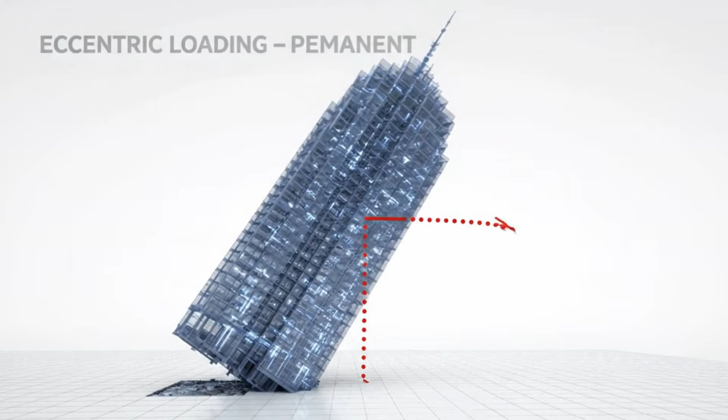The developer called it a bold statement in glass and steel. The architect called it a triumph of modern engineering. The marketing team called it the future of luxury living in New York City. The building called it something else.

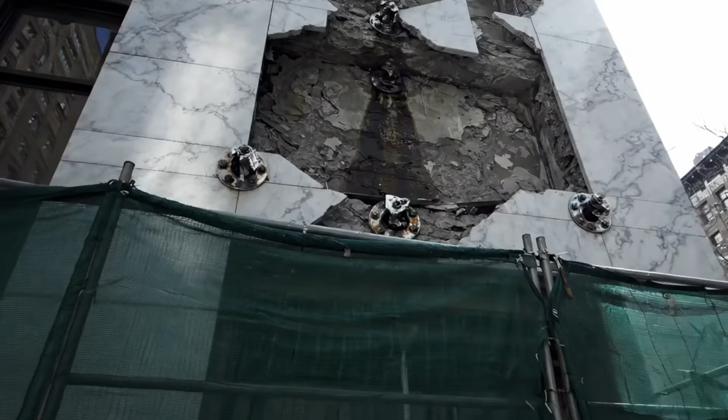Today, 161 Maiden Lane stands in Lower Manhattan like a question nobody wants to answer. It is 670 feet tall. It is structurally compromised. It has never been fully occupied. Marble panels have fallen from its facade, some weighing hundreds of pounds, crashing onto the sidewalks below. The city has declared it a public hazard. Protective netting wraps its lower floors like a bandage on a wound that never closed.

And the building bends. Not dramatically, not in a way you'd notice walking past, but stand far enough back, look carefully at the profile against the sky, and the tower curves, slightly, unmistakably, like a pencil balanced on its eraser and left to drift. Engineers call this a lateral deflection. New Yorkers call it the banana building.

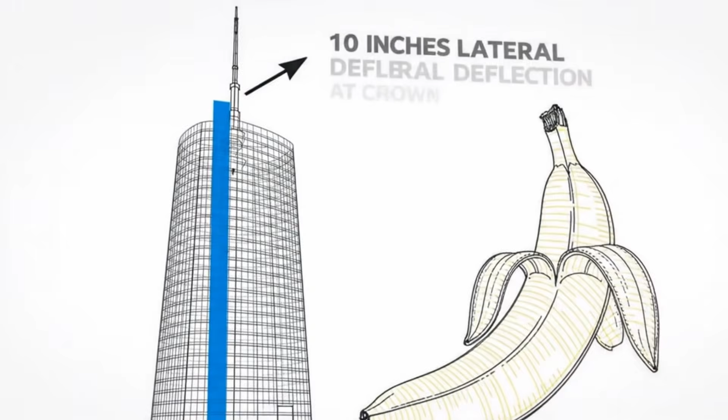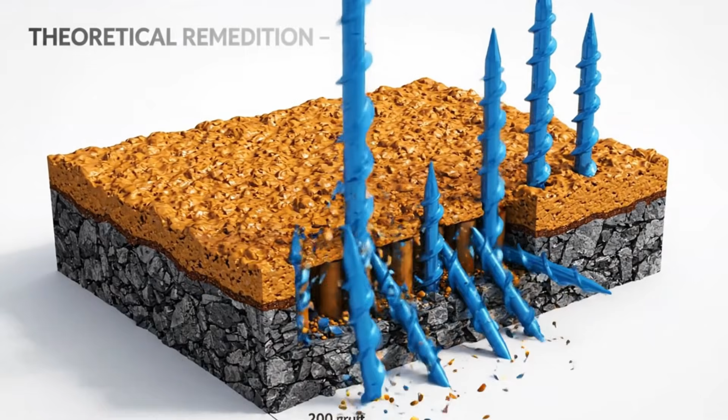$250 million was spent building it. Hundreds of millions more have been spent fighting over it. And the building remains unfinished, uninhabitable, unbending in its refusal to either be fixed or fall. This is the story of 161 Maiden Lane. And it begins not with corruption, not with negligence, but with something far more dangerous. It begins with a shortcut that looked, on paper, like genius.

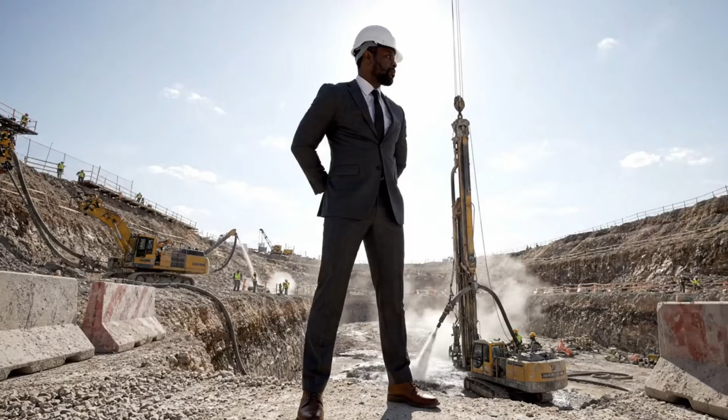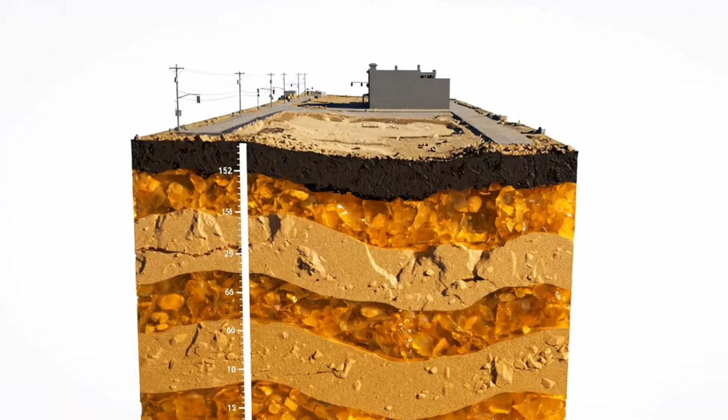The original sin. Every engineering catastrophe has a moment, a single decision buried in a spreadsheet or a meeting room that seems reasonable at the time and catastrophic in retrospect. For 161 Maiden Lane, that moment was a choice about the ground. Manhattan sits on some of the most reliable bedrock on Earth. Schist, dense, ancient, crystalline, metamorphic rock that pushed up from the Earth's crust hundreds of millions of years ago. It's why Manhattan can hold skyscrapers at all.

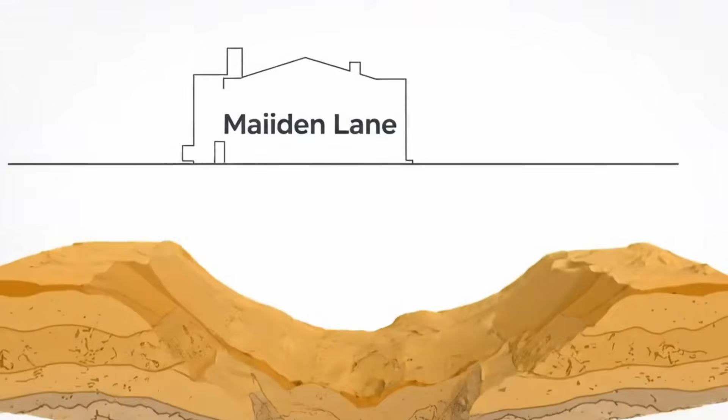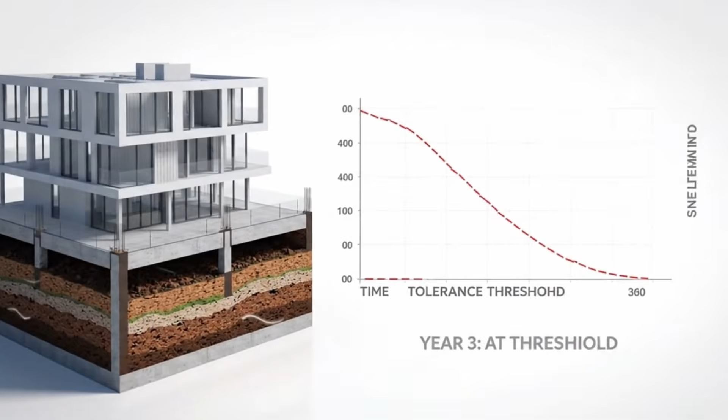Midtown's bedrock is close to the surface. So is downtown's. The island was built to carry towers, but between those two bedrock plateaus, in the area around Maiden Lane, the schist dips. It drops down, sometimes 150 to 200 feet below street level, beneath layers of fill, sand, and soft glacial sediment deposited after the last ice age. You can still build there, but you have to go deep. You have to find the rock.

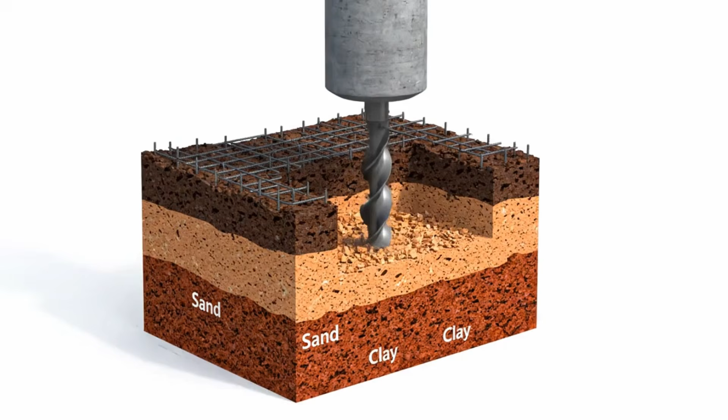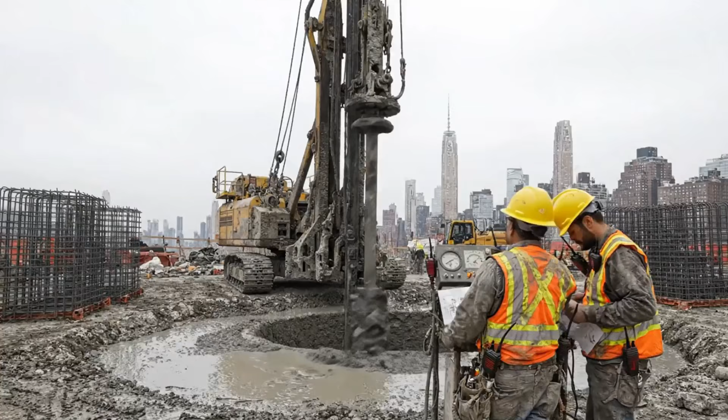The original foundation design for 161 Maiden Lane called for caisson foundations, massive concrete shafts drilled all the way down to bedrock, expensive, time-consuming, unglamorous, the kind of work that costs millions and produces nothing the marketing team can photograph. So the developer, Fortis Property Group, switched.

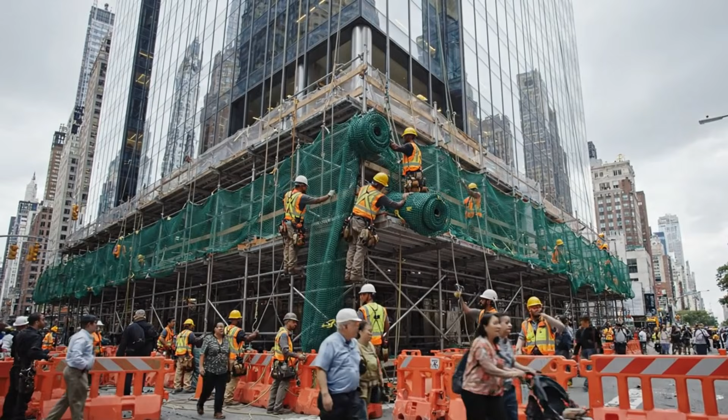Instead of caissons to bedrock, they used jet grouting, a technique where high-pressure water jets break up the soil and mix it with cement to create a stabilized column. Think of it like stirring concrete into a milkshake and hoping the milkshake holds up a skyscraper. It works in some conditions. It works when the soil is appropriate, when the engineering is conservative, when the loads are modest. The load here was not modest. It was a 58-story, 670-foot glass tower.

The savings from switching foundation systems, approximately $6 million. $6 million. On a $250 million project, a 2.4% budget optimization that engineers would later estimate contributed to hundreds of millions in damages, years of litigation, and a building that the city of New York has repeatedly called unsafe for occupancy. $6 million.

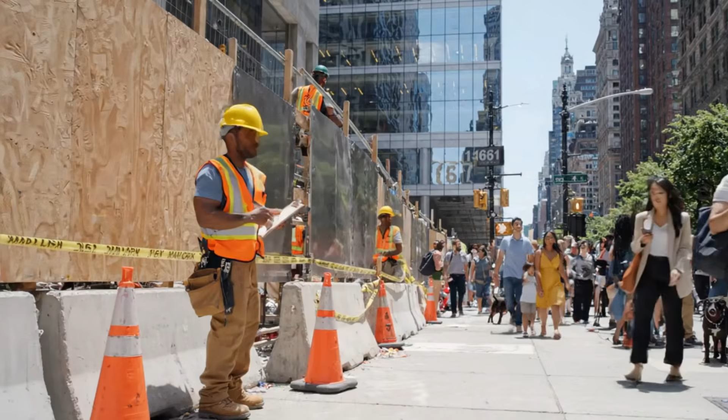The original sin of 161 Maiden Lane was not stupidity. The engineers weren't incompetent. The decision made financial sense inside a spreadsheet. But a spreadsheet doesn't feel the weight of 670 feet of glass and steel pressing down through soft glacial sediment. The schist does. And the schist was not consulted.

The physics. Here is what happens when you build a skyscraper on stabilized soil columns instead of rock.

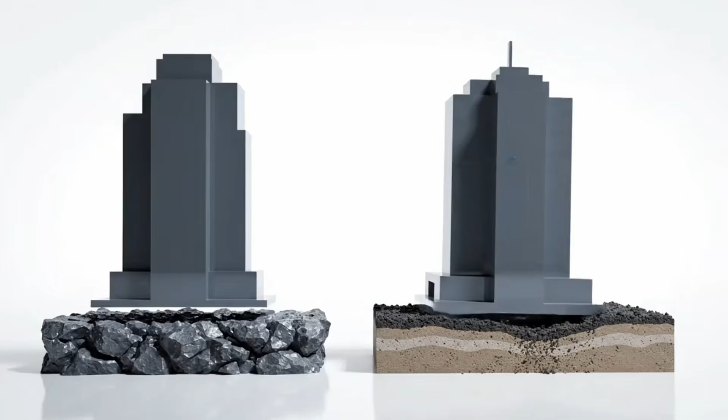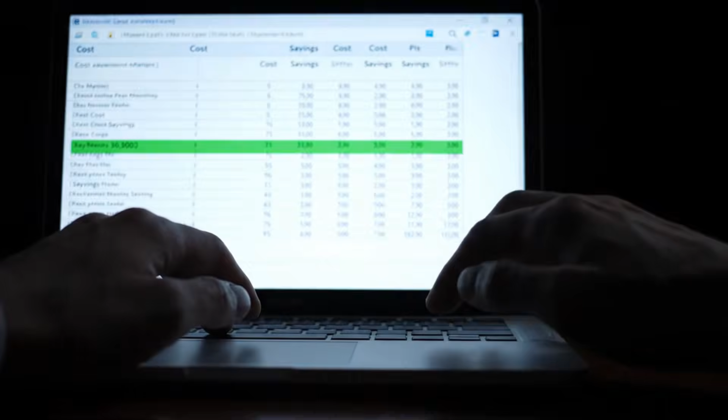The building settles. All buildings settle. Even ones on bedrock move fractions of an inch as the concrete cures and the loads distribute. That's expected. That's designed for. What's not designed for is differential settlement, when one side of a building sinks faster or further than the other.

Imagine driving 4 nails into a tabletop to support a heavy glass sheet. 3 nails go into solid oak. The 4th goes into balsa. Now pile books on the glass. 3 nails hold perfectly. The 4th compresses slowly, gradually, inevitably. The glass tilts, not much at first, then more.

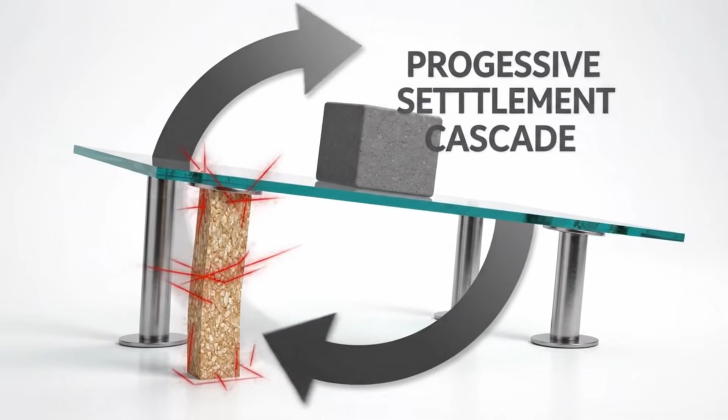The tilt redistributes the load. Now more weight shifts toward the soft corner, which makes it compress further, which makes the tilt worse, which shifts more weight. That is a progressive settlement cascade. And that, in broad mechanical terms, is what began happening at 161 Maiden Lane almost immediately after construction loads were applied. But the physics didn't stop at settlement.

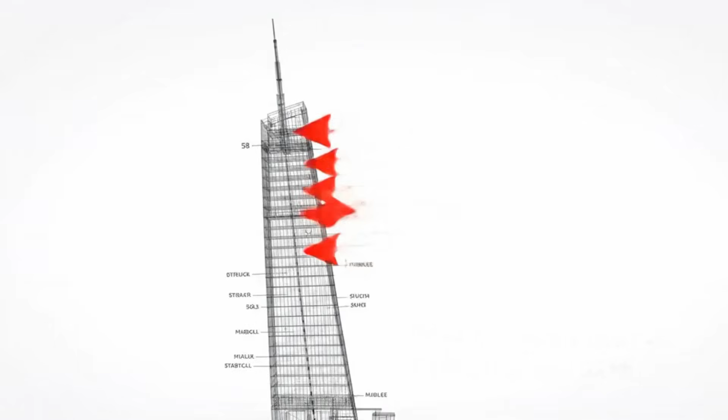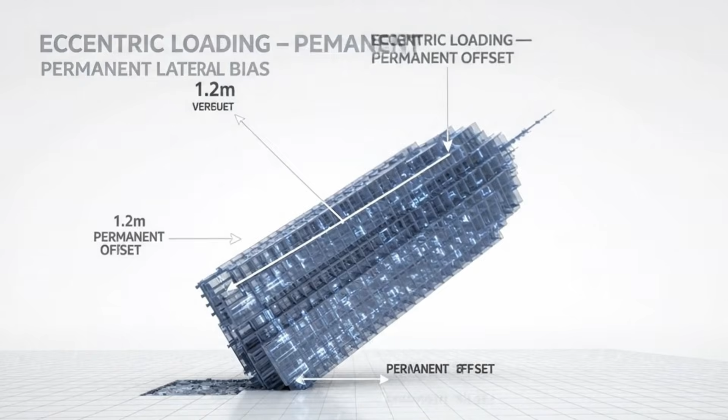A 58-story building is not a rigid block, it flexes. Wind pressure alone causes the upper floors of a tall building to sway feet in either direction. This is designed, this is expected, this is why skyscrapers don't snap in half during storms. But when a building's foundation settles unevenly, it introduces a permanent lateral bias into the structure. The building doesn't just sway, it leans toward its bias point and stays there.

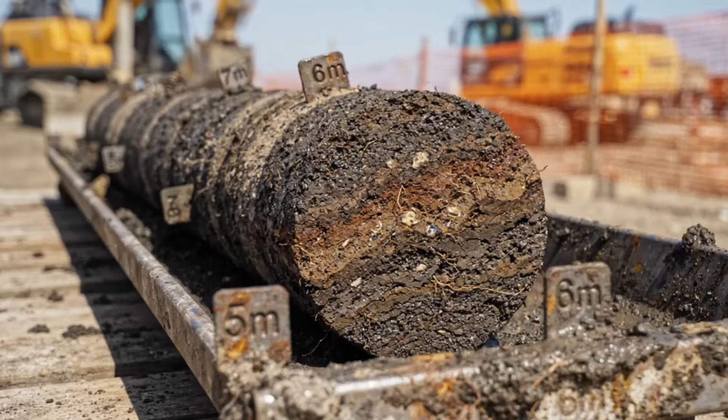The technical term is eccentric loading. The informal term is the building is bent. And a bent building has a problem its designers never anticipated: its own cladding. The exterior facade of 161 Maiden Lane was clad in large panels of thin marble. Beautiful, expensive, photogenic. Marble is rigid, it does not flex.

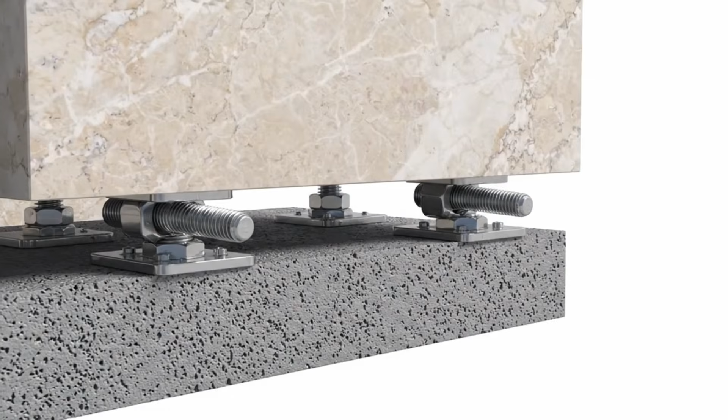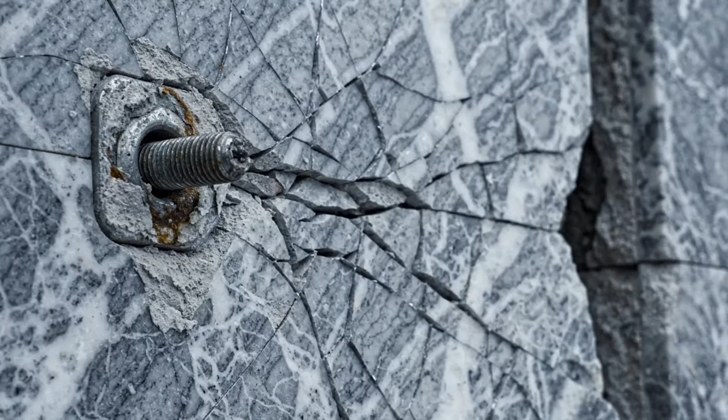When the building beneath it began to move, settling, leaning, cycling through thermal expansion during New York's seasonal temperature swings, the marble panels couldn't follow. They cracked. They separated from their anchors. They fell. Thermal hysteresis, the lag between a material expanding in heat and contracting in cold, means marble panels on a moving building face stress cycles every single day.

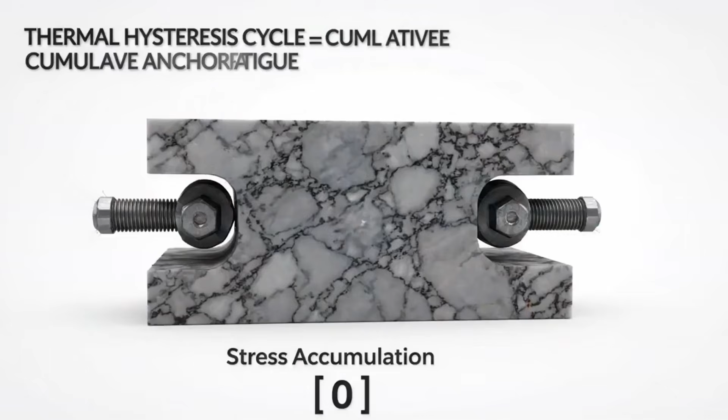Summer heat expands them. Winter cold contracts them. Each cycle, the anchors loosen fractionally. After enough cycles, the panels detach. The first panels fell in 2019, then more. Then the city intervened. Protective nets were installed around the lower floors. Residents of neighboring buildings were warned. Pedestrians were redirected. A $250 million tower was dropping its skin onto a Manhattan sidewalk.

The building wasn't collapsing. It was something more insidious. It was slowly, methodically disassembling itself, panel by panel, anchor by anchor. While the lawyers argued and the engineers filed reports and the building stood there, bent and patient, shedding its beautiful exterior like a snake that had nowhere to go.

The deadlock. Here is where the story stops being about engineering and becomes something older. Something almost mythological. 161 Maiden Lane is caught, frozen, trapped in a legal and economic amber that no amount of money or ingenuity has been able to dissolve.

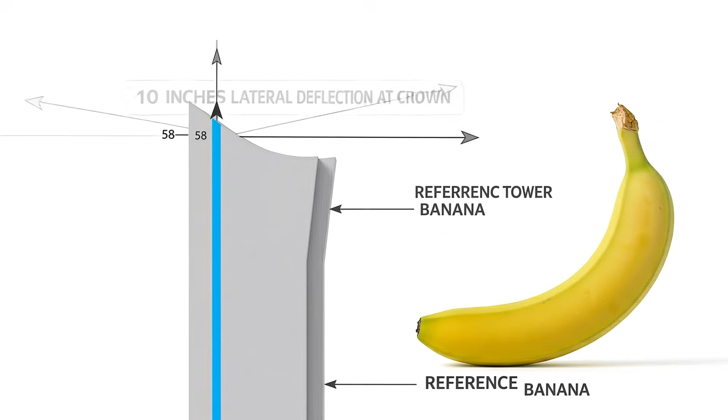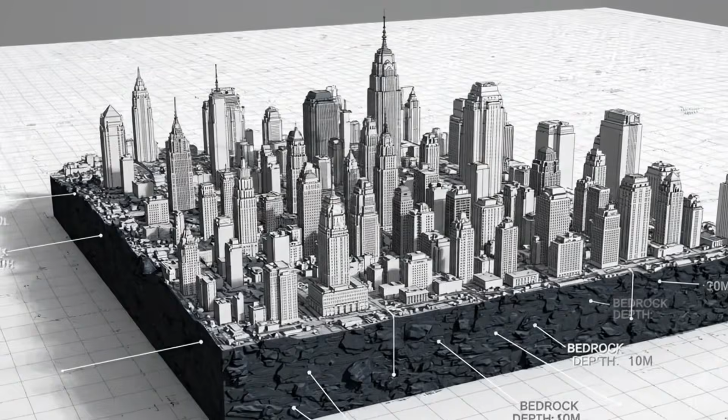Can it be fixed? Theoretically. The foundation could be underpinned. New, deep piles driven to bedrock, the building's base stabilized, the lateral lean addressed. The facade could be stripped and reclad in a material that tolerates movement. The structural compromises could be remediated, floor by floor, system by system.

The cost of doing all of this? Estimates range from $200 million to over $400 million. On a building whose current market value, compromised, uninhabitable, litigation clouded, is a fraction of what was originally invested. The mathematics do not work. They have never worked. Every party that has examined the numbers has reached the same conclusion. Fixing this building costs more than the building is worth.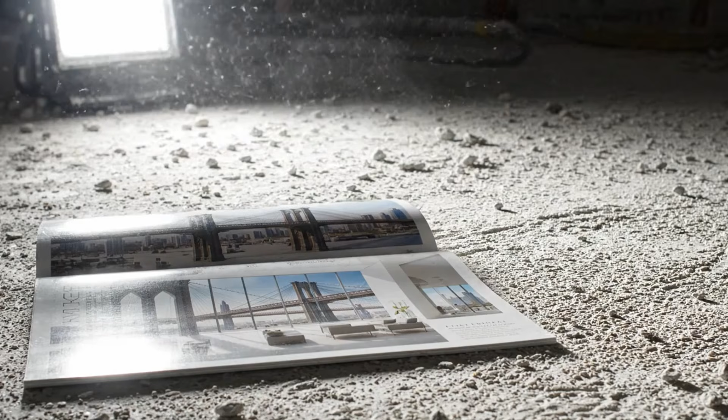Can it be demolished? Also theoretically, yes, but demolishing a 58-story tower in the middle of Lower Manhattan, surrounded by occupied residential buildings, active subway infrastructure, the East River waterfront, and one of the densest urban environments on Earth, is not a weekend project. The logistics alone would require years of planning, hundreds of millions of dollars, and a level of coordination between city agencies, neighboring property owners, and infrastructure operators that makes the original construction look simple.

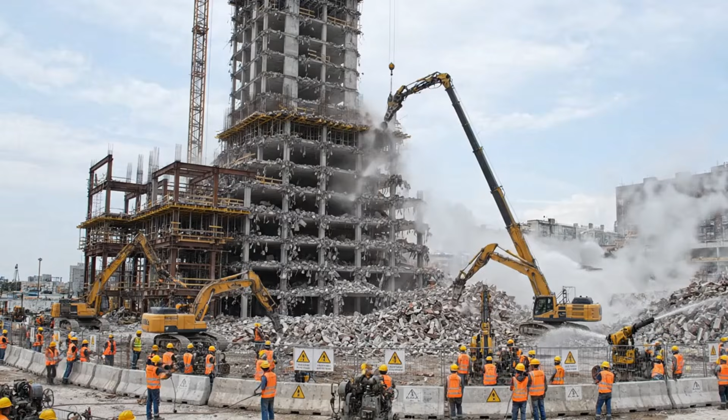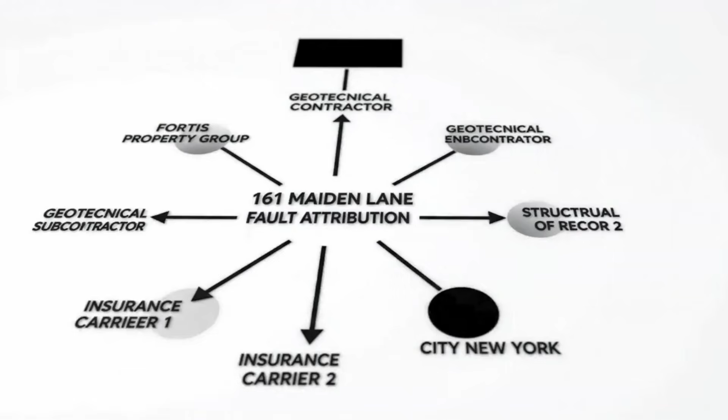And who pays for it? That question has been the subject of lawsuits, countersuits, arbitration proceedings, and legal battles that have consumed years and generated legal fees that rival the original construction budget. Fortis Property Group, the original developers, the contractors, the subcontractors, the insurance carriers, the city. Every party has pointed at every other party.

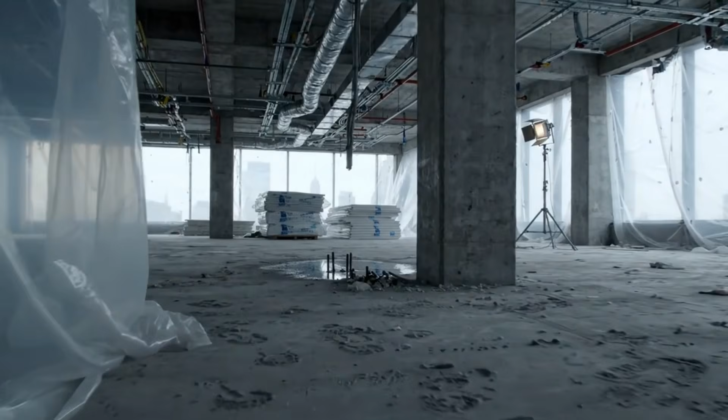Settlements have been reached and broken. New claims have been filed over old claims. The building stands in the center of all of it, patient, bent, unmoved by human argument, while the lawyers bill and the panels fall and the nets catch whatever comes loose next. This is what legal amber looks like at 670 feet. A building too broken to live in, too expensive to fix, too complicated to tear down, and too tall to ignore. It just stands there, shedding.

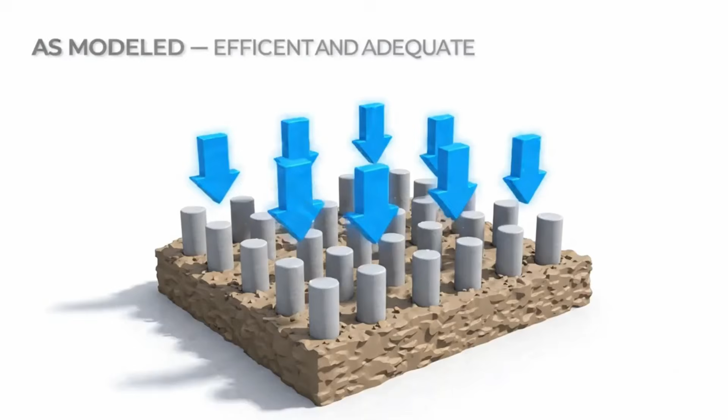Let me tell you what $6 million actually bought. It bought the illusion of efficiency. It bought a foundation system that worked on paper, in a spreadsheet, in a budget meeting where the geotechnical report was in a binder that someone had skimmed. It bought a shortcut through the part of the process that nobody photographs and nobody celebrates. The part that goes 150 feet underground and touches schist that has been there since before mammals existed. It did not buy what it was supposed to replace.

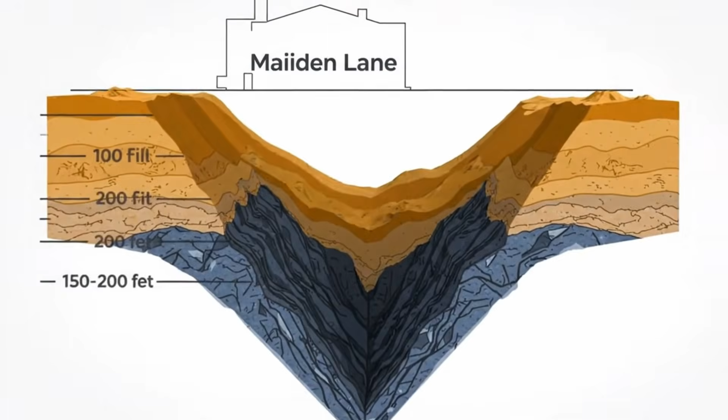And now, that $6 million in savings has generated an accounting ledger that no one in the room that day could have imagined. $250 million spent building it. Hundreds of millions in litigation. Remediation estimates pushing $400 million. Years of lost revenue on units that were sold, refunded, sold again, and eventually abandoned. A building that generates legal fees faster than it could ever generate rent.

The Greeks had a word for this: hubris. Not arrogance in the crude sense. Not the arrogance of a villain who knows he's wrong and proceeds anyway. The specific, tragic arrogance of a person who is completely, genuinely convinced they have found a smarter way. Who looks at bedrock 155 feet below street level and sees not a foundation, but an inconvenience. Who looks at $6 million in savings and sees not a risk, but a triumph.

Hubris doesn't announce itself. It arrives dressed as efficiency. It comes with spreadsheets and confidence and a foundation report that technically clears the threshold. It shakes hands in a conference room on the 40th floor of a building that is itself standing on bedrock, and it makes a decision about a different building that will stand on something softer.

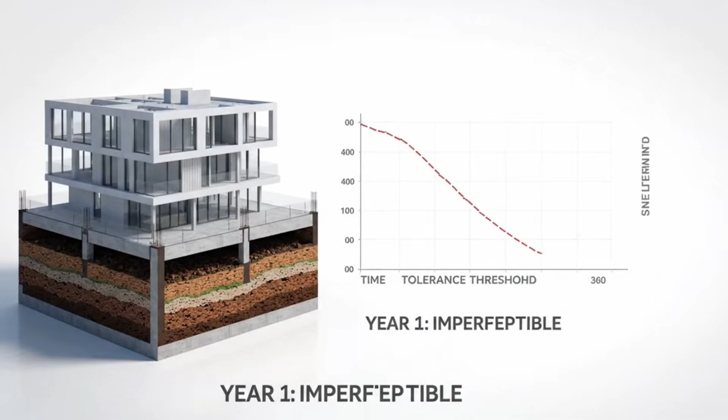And then the physics begins. Not immediately, not dramatically. Slowly, quietly. A millimeter of settlement here. A fractional lean there. A marble panel that takes 7 years of thermal cycles before it finally separates from its anchor and falls 60 feet onto a Manhattan sidewalk where it shatters on concrete that doesn't care about the meeting that caused it.

161 Maiden Lane is not a cautionary tale about bad people making bad decisions. It is something more disturbing. Good people making a rational decision that ignored the one party that doesn't negotiate. The schist. The schist was always there, 155 feet down, ancient and indifferent, carrying the weight of every proper building that found it and utterly indifferent to the ones that didn't.

It didn't move when the jet grout columns were poured above it. It didn't warn anyone when the loads began to shift. It simply sat there, as it has sat for 400 million years, while above it, a tower bent slowly toward the sky and the humans who built it argued about who was responsible. Gravity doesn't file briefs. Soil mechanics don't attend depositions. The Earth doesn't renegotiate its terms because the budget needed trimming.

The banana building will stand in Lower Manhattan for years more. Probably. Most likely. Wrapped in its nets, shedding its panels, housing its legal disputes. A 670-foot monument to the precise moment when human confidence and geological reality stopped agreeing with each other. The schist is still down there. It always was. It's still waiting to be asked.